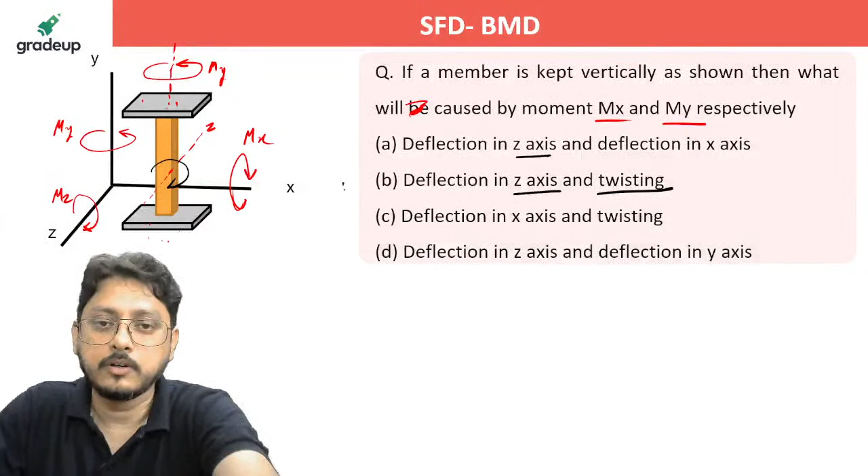So there was a student who asked me regarding that. Now, I hope you are able to understand how the twisting and bending can be understood with mx and my.

Now a beam is given here. Is it visible to you? The beam is given here. Beam AB will be subjected to... what will be the answer for this one? The beam AB will be subjected to...

Yes, I'm just waiting for your comments. Okay, it is quite simple, no? Just shift it. Shift the P.

Although you can do it in a different way, there are always several ways to do that. Here, what I suggest is you can shift the load simply. If you are shifting it here, what will you get? P into C. This is the direction of your bar, so you will get a moment which is nothing but P into C.

Right, then you will get P. So you have shifted it here. Shift it once again, so PC can be pushed there, along with P acting downward. Shift it once again, that P will come here, and P into B, a moment will be created here, like this.

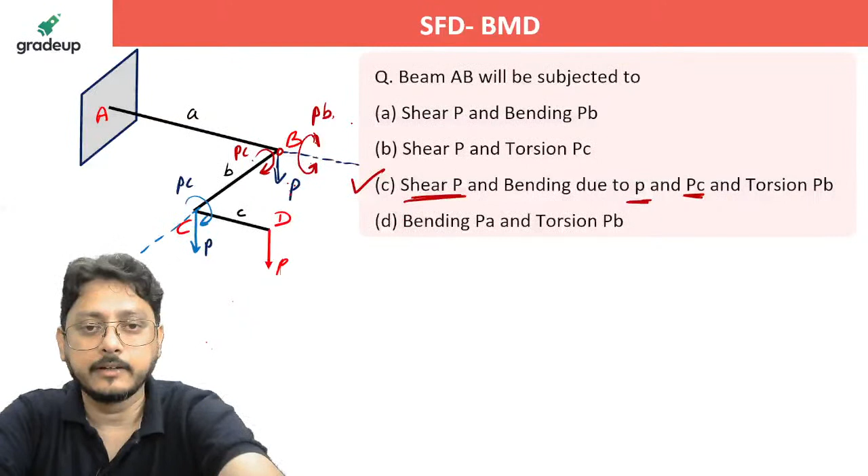Now the question is, for the given loading, find the distance from the left hinge support where the shear force will be zero. How will we do this? From the left side of the support, left hinge support, where the shear force will be zero.

How will we do that? First of all, you should be able to draw the shear force diagram. Before drawing the shear force diagram from this particular loaded beam, what I'll do is first shift the load here.

That 10 kilonewton, if you shift it here, what exactly will you get? A 10 kilonewton will be applied here, and 10 into 3, that 30 kilonewton meter moment, will also come if you are shifting that one.

So over the beam now you have that axial 10 kilonewton, which is not going to create any trouble for us to get the vertical reaction.

Now what are the vertical reactions you will be having? So you have a UDL, that UDL will create... UDL 2 into 6, that is 12, the total vertical load due to the UDL. 12 divided by 2 is 6 and 6, you are going to get due to the UDL. Then you have a net moment which is 30 kilonewton meter.

Right? So what will be the reaction due to the moment? What I told you is draw the two lines, and see what is the direction of your net moment. The direction of net moment is clockwise, so the reaction will be generated in such a way that they will rotate anti-clockwise, to oppose the net moment.

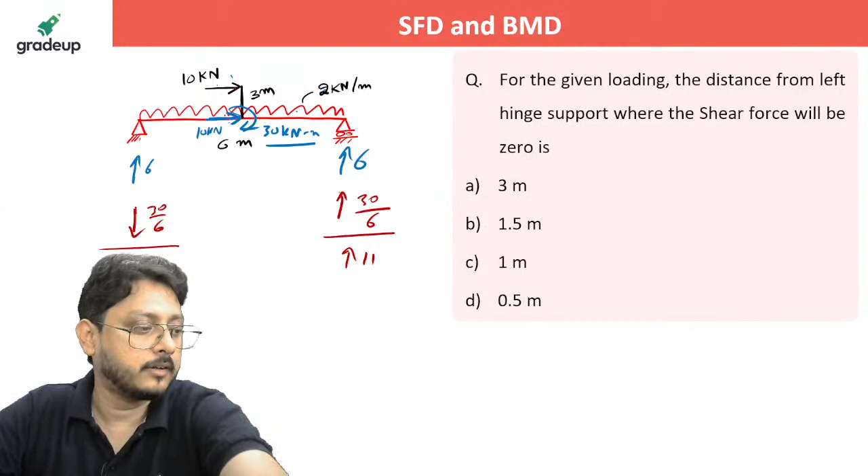This is the final reaction you have. Now if you draw the shear force diagram, what exactly you'll get? Draw the shear force diagram for this one.

Now stand nearby that. If 11 is acting upward side, if you stand here, 11 is rotating about you in anti-clockwise direction. If you're standing here, this 11 is rotating about you in anti-clockwise, so minus of 11 you'll get. Then if you stand here, 6 is rotating about you in clockwise, so plus 6 you'll get, plus 1 reaction, very small. So you'll get only 1 plus here.

Now in between, if you see here, you do not have any transverse load. You have axial, that is 10 kilonewton, and you have a moment, and axial will not disturb you in your shear force diagram. So you are going to get like this.

Now you have understood that somewhere here you have a shear force of 0. So consider the section somewhere here. You can do that with the help of similar triangle, or you can just consider the section. Both methods are okay. Either you solve it through similar triangle, or you solve it by considering the section at this location.

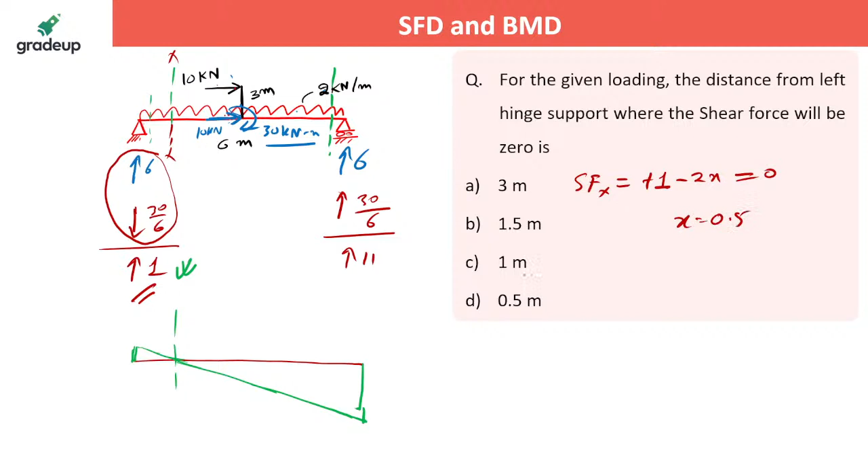For the given shear force of a loading on a beam, what is the total downward loading here? What is the total downward loading? Can you solve this one? Can you do this one?

See, you consider this section and you'll understand it. Suppose this is a beam. If you're standing at this particular location, you are getting minus of 22.5. When will you get that minus of 22.5? If you have upward reaction or upward loading, minus of 22.5, rotating about you in anti-clockwise. If you're standing at this location, you are getting plus of 27.5. What is the meaning of that? You are getting it upward, so it will rotate clockwise. You are getting plus of 27.5. So this is actually simply supported with these two reactions.

See, once I come to understand these two are the support reactions, which I'm getting 27.5 upward, 22.5 upward. You can do it in two different ways. Either you add these two, because all the vertically downward loading will be compensated or balanced by these two. Or just check it out once again if you want to.

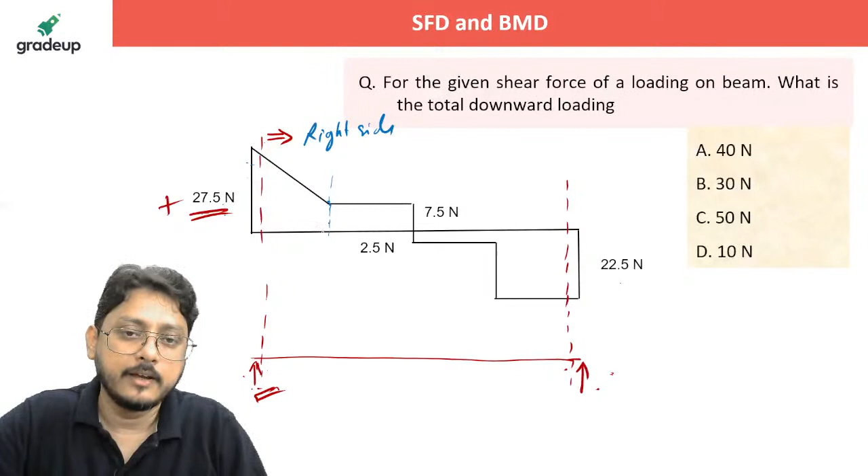So travel towards this side. If you are traveling toward this side, see, it is plus 27.5, which is upward. Now if you are coming towards right side, I'm moving towards this side, this is right side. If I'm moving towards right side and reaching at this location, the load reduced from 27.5, it is reducing by 20. So 20 downward, that too it is a UDL. Why? Because it has a linear variation.

Now from here to here you have a constant, so no loading. At this location, as I'm shifting from this location to that location, the sudden change, the total change in the shear force diagram is 10, which is coming down. So 10 kilonewton is downward.

Once again, if you are moving here, there is a change from 2.5 to 22.5. Once again, a 20 kilonewton is acting here. So 10 kilonewton is acting here, and 20 kilonewton is acting here. So total downward force here, this total amount is 20.

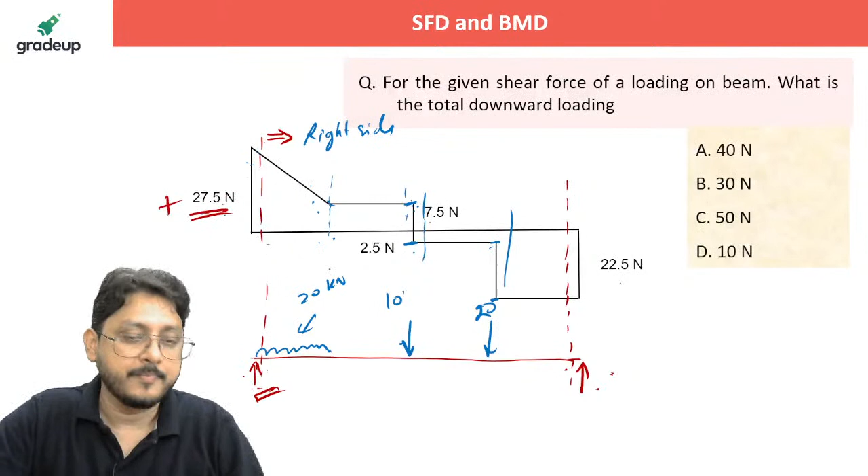This, I'm not writing down the intensity. It is 20 kilonewton over this length. If someone will ask what is the intensity, it will be 20 divided by length. So 20 plus 10 plus 20, it will be 50 Newton.

A cantilever beam OP is connected to another beam PQ with a pin joint as shown in figure. A load of 10 kilonewton is applied at mid. See, it is not about only this type of problem. He's asking what is the moment at O. The moment at O, how you will calculate?

Always remember, whenever you have a hinge, always remember, draw the hinge. If it is provided, if it is loaded at this location, the beam PQ will get the reaction at P location from the other beam, which is OP. And now it will create a load over this OP beam at this location.

This is the free body diagram. Now this is the reaction at P. Even if the loading is here and there, you calculate by considering it simply supported, and the reaction at P will be applied here simply.

Now if it is symmetrical, it is quite easy to understand. 10 is there, so RP will be 5. 5 is acting here and the distance is 2. So 5 2s are 10. 10 will be applied here.

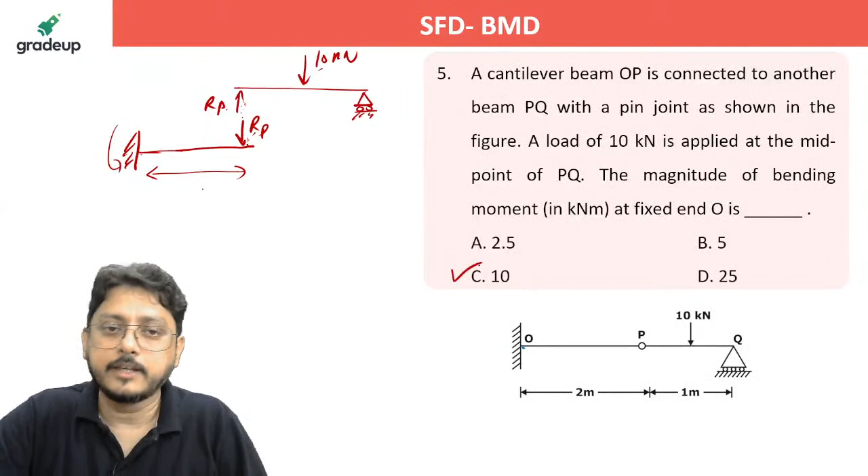So yes, a resisting moment or a bending moment, whatever you are asking, 10 kilonewton meter will be the moment at O. 10 kilonewton meter will be the moment at O. Are you able to understand that?

A simply supported beam has a shear force diagram as shown in figure. Which of the statement is correct for the loading diagram? Can you identify?

Which of the statement is correct for the loading diagram? See, it is written here, it is a simply supported beam. The best part is that he has written it as simply supported beam. Now, if you know how to draw the shear force diagram, you obviously can identify it. Can you tell me which of them are correct here?

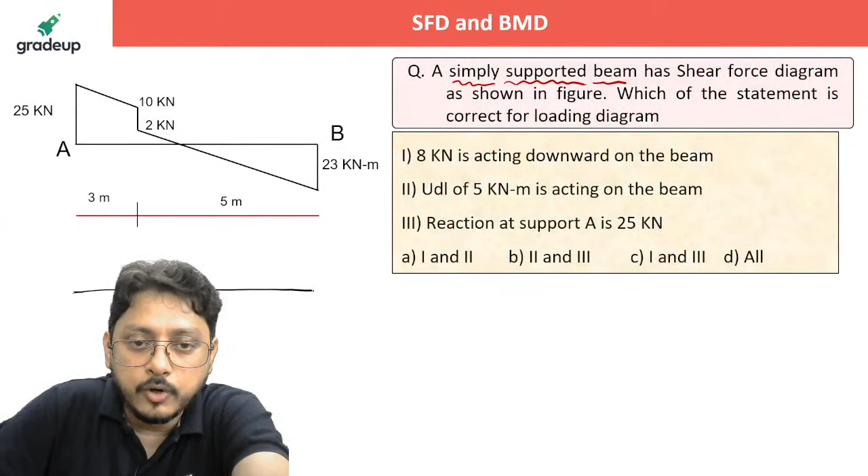Now, consider the section. Okay, just first of all, it is a simply supported beam. Nice to us, simply supported beam. Okay, simply supported beam, right. Now, for the simply supported beam, if you will consider the section here, just a moment, I'll take section here.

Suppose if you are considering the section here, what is the meaning? You are having a minus of 23. When you will get the minus of 23? If you have upward reaction here, then only it will rotate about you in anti-clockwise. About you means you are standing here, no? About you, it will rotate.

Anti-clockwise you'll get minus. Now consider the section here. When you are getting plus of 25, if it is upward, then only you will get plus 25, because now you are standing here. So it is rotating about you clockwise, so it is plus 25.

Now if you are coming down from here, from A to maybe C, the load changes from 25 to 10. So total change is 15. Total change is 15. So I can understand that it is linearly varying. So it is a UDL.

What is the intensity of UDL? First of all, this is the reaction 23 here. This is the reaction 25 here. Now UDL intensity will be the total change. So slope of the shear force diagram will give you the intensity of the load.

Now total change here is 15 over the length of 3. So the intensity will be simply 5. 15 divided by 3, 5 kilonewton per meter.

Now from at this location C, there is a sudden drop down from 10 to 2. So there is a concentrated load acting there. There is a concentrated load 8 kilonewton. Total change from 10 to 2, that is 8 kilonewton is acting here.

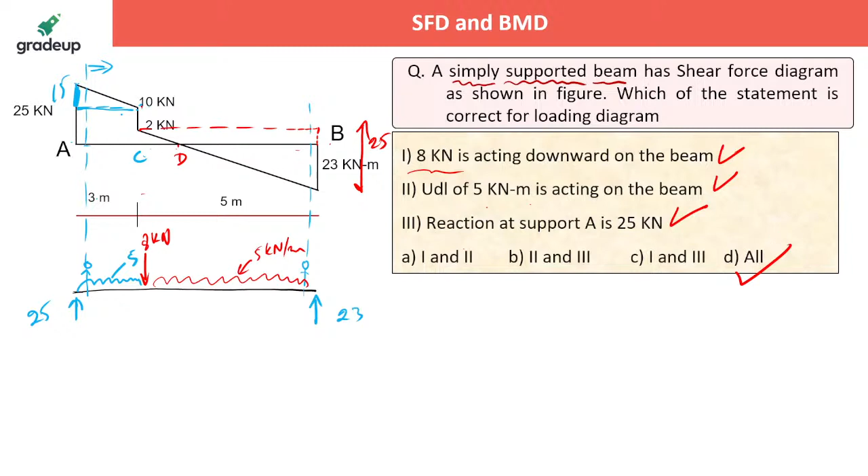Did you get that? Now what about this one? A simply supported beam has a shear force diagram as shown in figure. Which of the statement is correct for the loading diagram?

Now consider this as a beam length as 10 meter. Beam length of the beam as a 10 meter. Which one of them are correct?

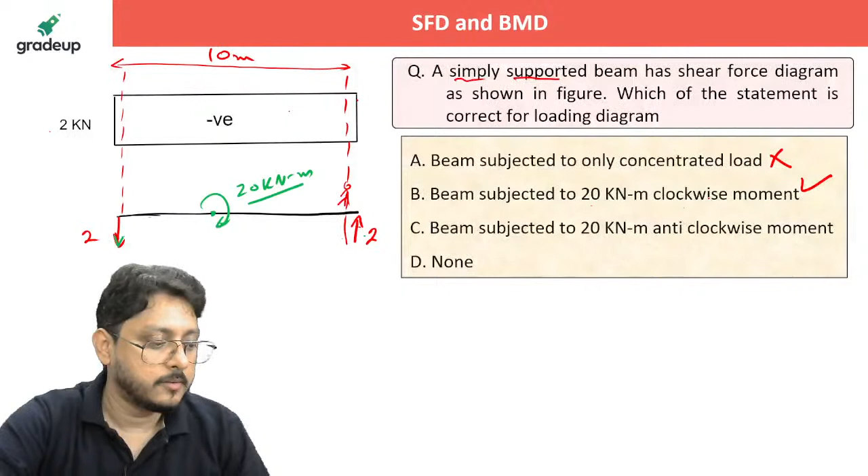Can you tell me which one is correct here? Now once again, take your beam. This is your 10 meter beam. Length of the beam is 10 meter.

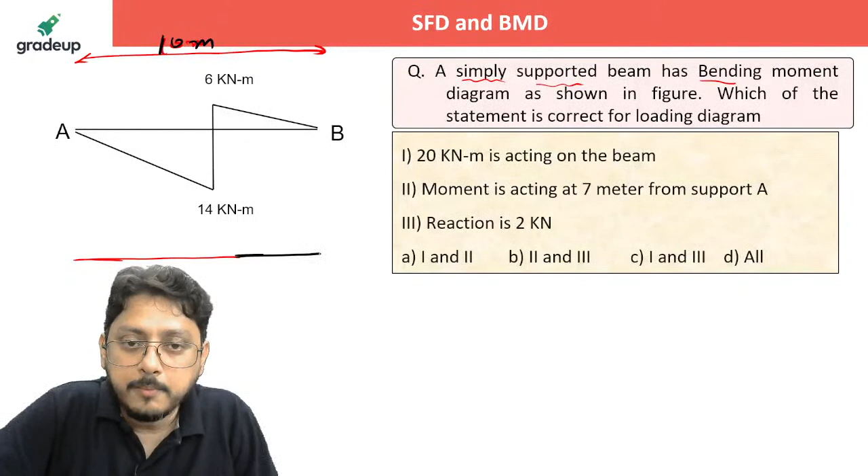10 meter, right? Now, bending moment in a simply supported beam, when will you get zero? At these two places you have a zero bending moment. Means what? These two are the hinge locations, the end hinge positions where you will get bending moment zero.

Now you know that in a bending moment diagram the sudden change will be observed only when a moment is acting directly at that position. So a moment is acting, maybe consider that a clockwise moment is acting. What is the value of the moment? How will you identify the value of the moment? The value of the moment is nothing but the total change there.

Whatever the total change is, from 6 to 14. See, the way you identified for the shear force diagram, whatever total change you have in a shear force diagram represents concentrated load. Here, whatever total change you have represents the moment acting on the beam.

So here, total change is how much? From plus 6 to minus 14, that is a total change of 20. So 20 kilonewton meter is acting over the beam.

Isn't it? Now if you are standing here, you can easily identify when you will get the 14. If it is 10... now if 20 is acting over the 10 meter, you already know that. If it is clockwise, obviously the anti-clockwise 2 will act here. That is how they will compensate, no?

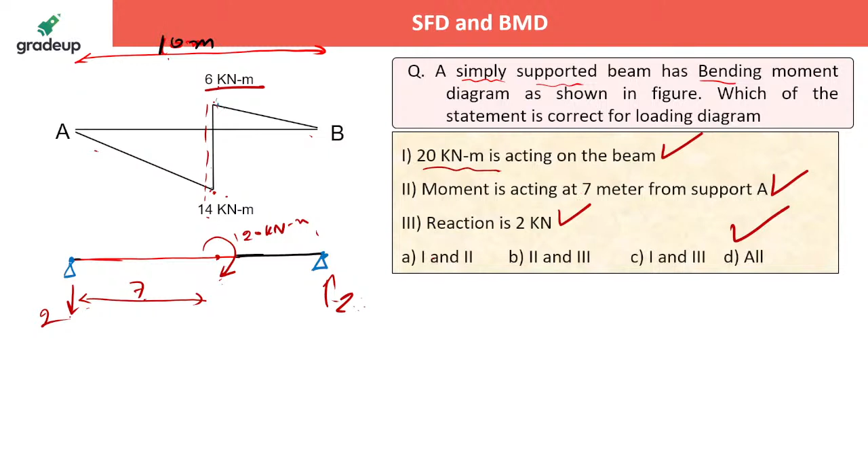Did you get that? Any doubt, please ask me. If you have any doubt, please ask me.

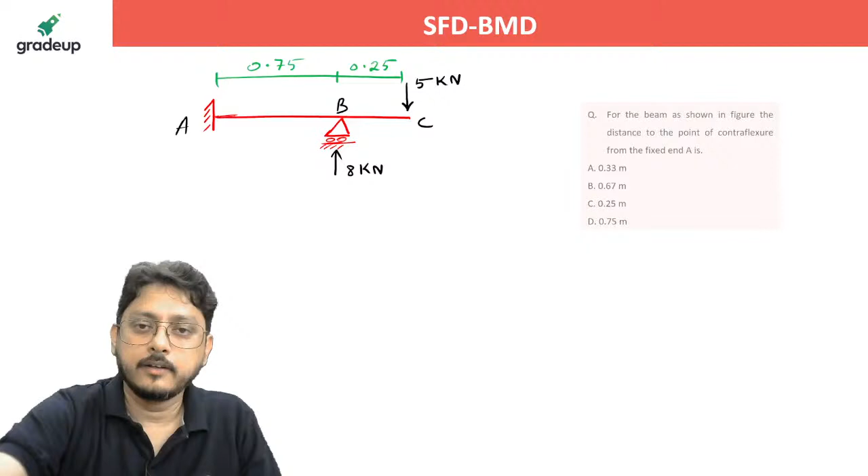Okay, next one. For the beam as shown in the figure, the distance to the point of contraflexure from the fixed end A is... what is the distance of the point of contraflexure from the fixed end A? How will you do this one?

First of all, you should understand that it is a kind of propped cantilever. It is indeterminate. But here we do not have to worry about it. Why? Indeterminate, but already the reaction is given to us. So it is known, it is a known quantity for all of us. We don't have to worry about that unknown.

Now, if you draw the bending moment diagram, then only you will be able to understand where the point of contraflexure is going to come. So over that beam, if you see here, this is the free end, zero bending moment. That's all. At B, you just draw the bending moment diagram here, right? At B, what is the bending moment?

And at this location, if you directly calculate what is the bending moment at A, so bending moment at A, if you write down, that is bending moment at A. What is the bending moment at A? See here, 5 into 1 is producing a hogging, then plus 8 into 0.75 is creating a sagging. What you will get? A plus of 1. So here you are getting plus of 1.

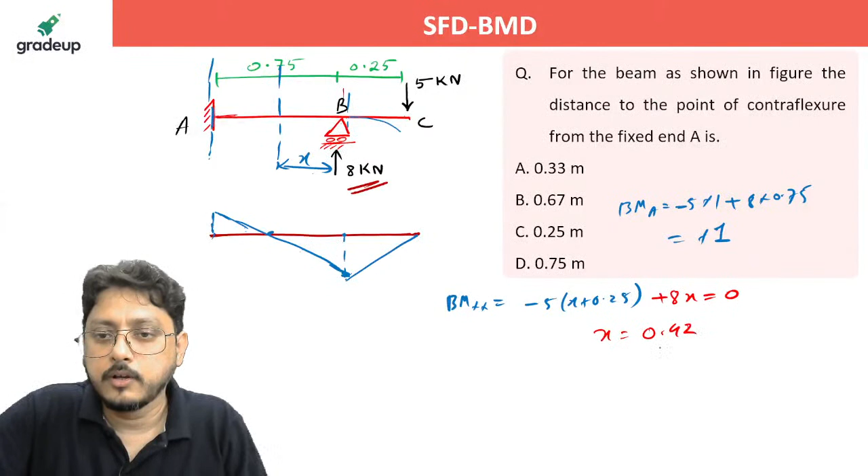From here, if you calculate x, you will get almost around 0.42. But he has asked the distance from A, the fixed end A. From fixed end A, the distance is 0.75 minus 0.42, and you will find it is 0.33.

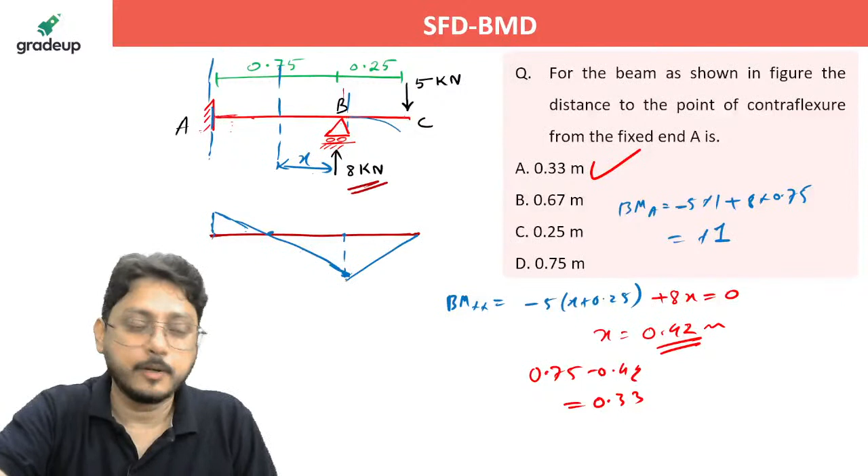If you have any doubt, please let me know. Are you able to understand that? Now what about this one?

The bending moment at A for the beam as shown in figure. What is the bending moment at A? What will be the bending moment at A? Yes, Santosh. What is the bending moment at A? How will you calculate? This is very simple.

Just take the section at A. Either you shift the load to the beam AB directly at this point, or you just see the line of action of the force, right? So if you are writing down the bending moment at A, the moment 20 is applied here.

That 20 will create sagging, so I will take plus of 20. Then 10 into 2 will create hogging, so minus of that, and you will get 0. That's all, it is 0 here. Always see the line of action and multiply with the perpendicular distance.

If you want to shift it, from the shifting point of view also you can understand it. No problem at all. Shift that 10 kilonewton from here to here. See, this is already done. If you want to shift it, you can shift it easily. From 10 kilonewton, you shift it here.

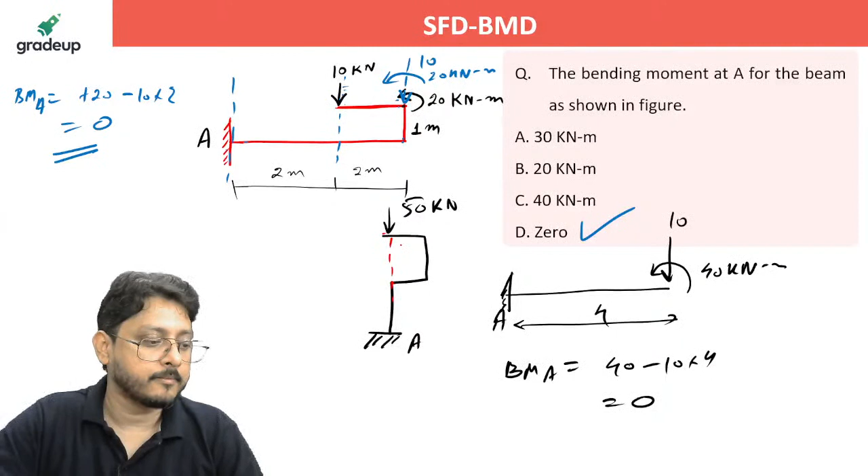Or maybe you shift the force to come here, then also you'll get the same thing. Are you able to understand that?

Next one, the position of maximum bending moment from the left support will be. What will be the position of maximum bending moment from the left support here?

Can you do this now? So to get the position of maximum bending moment, draw the bending moment diagram, or find the maximum bending moment. Do you have any idea?

You will get the maximum bending moment where the shear force is zero. Are you able to understand that? You will get the maximum bending moment where the shear force is zero.

If you want to draw the shear force and bending moment diagrams, first you need to calculate the reactions, which you will get as almost 8 kilonewton here and 2 kilonewton here. That I'm not calculating, you have to calculate it. Now draw the shear force and bending moment diagram both.

If you draw the shear force diagram first, what will you get exactly? Stand here. Okay, just stand here. How is 8 kilonewton rotating about you? It is rotating anti-clockwise, so minus 8. Then do not look in between the UDL.

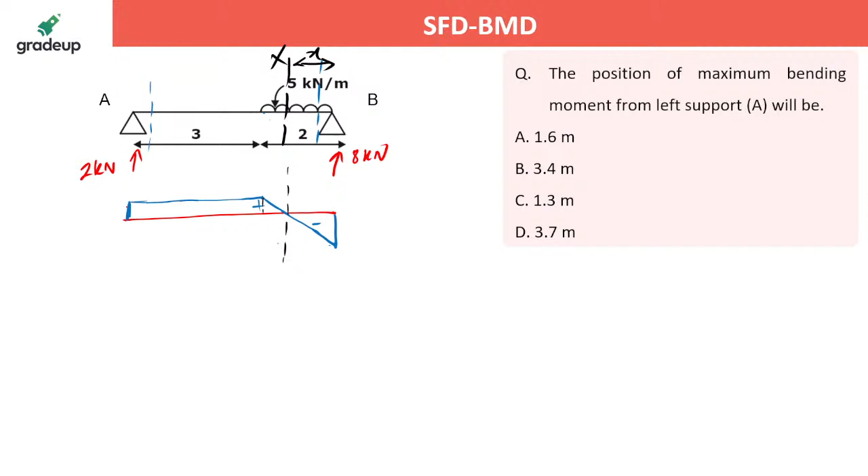Either you solve it through similar triangles or just consider a section here. Consider the section at distance X from here. Take it from the X distance, write down the shear force only.

He's asking what is the maximum bending moment, but while you write down the shear force and equate it to zero, you will get it very easily. So shear force at section X must be equal to zero. What is the shear force there? Summation of all the transverse forces, right?

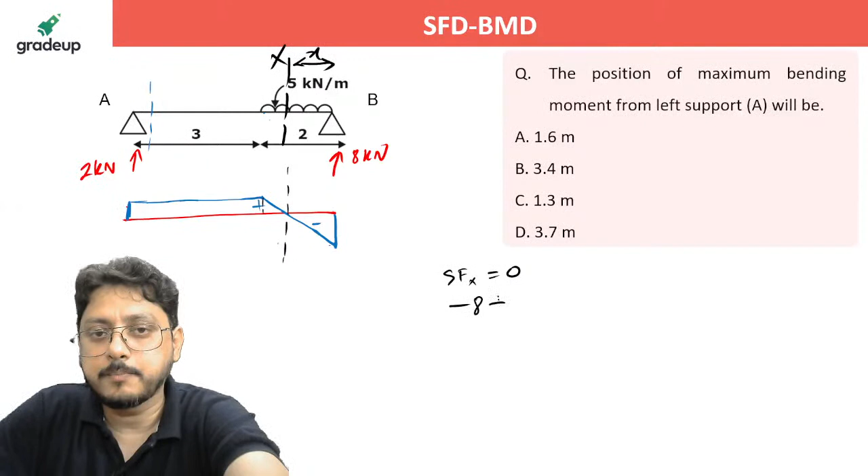What is that transverse force? 8 is acting, rotating anti-clockwise so minus 8, then plus 5x, that's all, must be equal to zero. How much are you getting? X will be 8 by 5, that is 1.6 meter. Did you get that? Simply you'll get 1.6 meter.

Are you able to understand that? Please let me know if you have any doubt here.

Shear force and bending moment problems are easy if you practice more. And if you have real clarity about drawing the shear force diagram and bending moment diagram, you'll find that these problems are very easy.